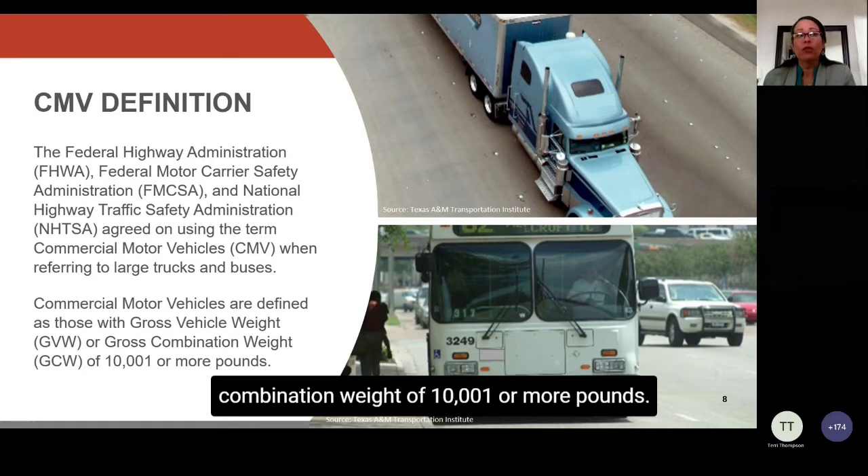Before we share some information with you, I want to make sure everybody understands the definitions for commercial motor vehicle and work zone that we've been using throughout this effort. Federal Highway has been partnering with NHTSA, Federal Motor Carrier, and other stakeholders to improve commercial motor vehicle safety in work zones. For commercial motor vehicle, we use terminology from the Federal Motor Carrier Safety Administration: a gross vehicle weight or gross combination weight of 10,001 or more pounds. For work zones, we follow the Manual on Uniform Traffic Control Devices, 2009 final version, which defines a work zone as an area of roadway where construction, maintenance, or utility work is occurring.

Unfortunately, the number of work zone crashes and fatalities continues to go up, with 2019 being the latest data available from the NHTSA FARS system. There were 762 fatal crashes in work zones. Of those, 250 fatal crashes involved a CMV. When I say involve, it doesn't mean the large truck or bus was at fault—it means the CMV impacted another vehicle or person, or was impacted by a vehicle.

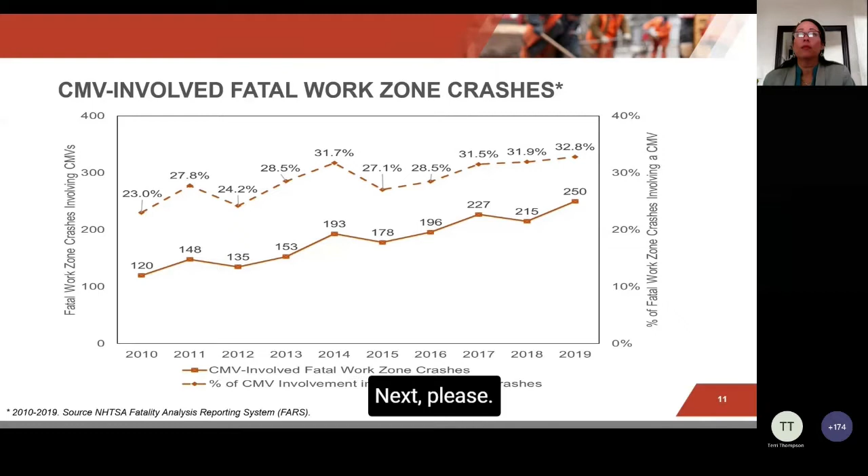We have several efforts within Federal Highway. Previously, we worked closely with some of our states and are currently developing a voluntary action plan that can be used by anybody in the nation. Our current effort, and one of the reasons why we're here today, is to share some of the findings and strategies we've been sharing throughout this new effort, which works closely with our 10 opportunity states. As part of this current task, we conducted a targeted state-level effort to promote commercial motor vehicle safety in work zones, working closely with those 10 opportunity states.

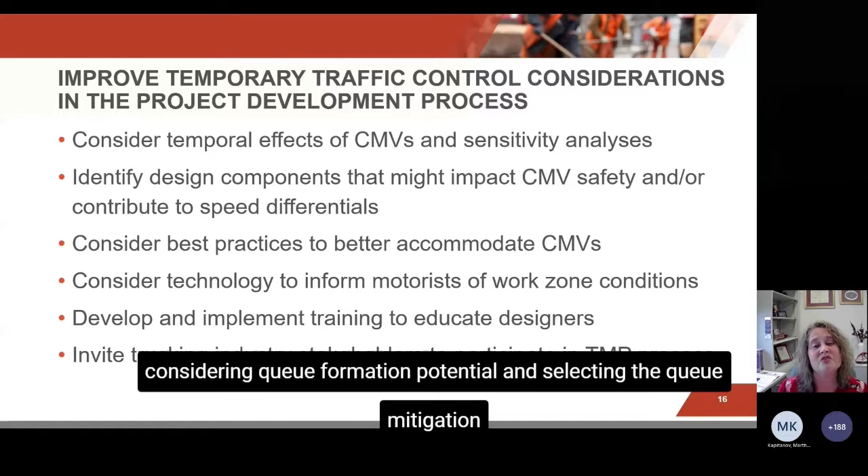A couple of things in particular that we talked about surrounding this topic: the importance of considering the temporal effects of CMVs and sensitivity analysis when considering queue formation potential and selecting queue mitigation measures. We also discussed the need to check for design components that might impact CMV safety or contribute to speed differentials early on in the project.

This could include consideration of lane widths, shoulder condition, the use of all or part of your shoulder as a travel lane to better accommodate CMVs, barrier offsets, the width of the temporary traffic control devices themselves and how that may impact your available lane width for travel, workspace needs, temporary traffic control device or work encroachment, and the design of transitions into and out of the work zone, as well as entry and exit points for work vehicles.

Best practices to better accommodate CMVs could include a variety of things, but in particular we talked a lot about going beyond the minimum design requirements and avoiding design exceptions as much as possible. This could extend the lane closure taper to account for actual operating speeds, not just the posted work zone speed limit, and providing longitudinal buffer space after the merge points and before temporary barriers.

Designing crossovers and lane shifts to better accommodate those CMVs, ensuring extra lane width through those crossovers to help with side swipes and other kinds of crashes, and removing edgeline rumble strips as needed, again to accommodate shifting of traffic, the utilization of a shoulder, etc.

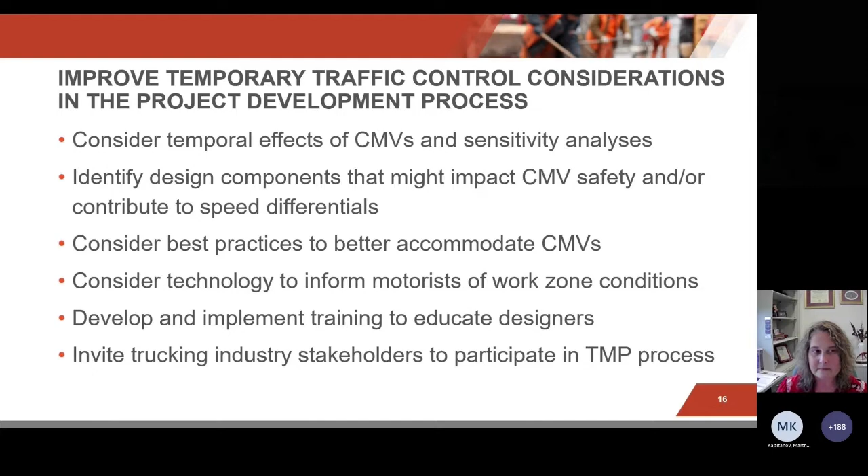In particular, one smart work zone technology we discussed a lot was that used to alert and detect queue formation. We wanted to share as part of this workshop some findings we've been sharing with those stakeholders.

But we do want to point out that the effectiveness of smart work zone technology really depends upon how often and how long queues form, and the quality of the technology and its deployment. So if you would like more information on these studies, we'll be glad to get that for you.

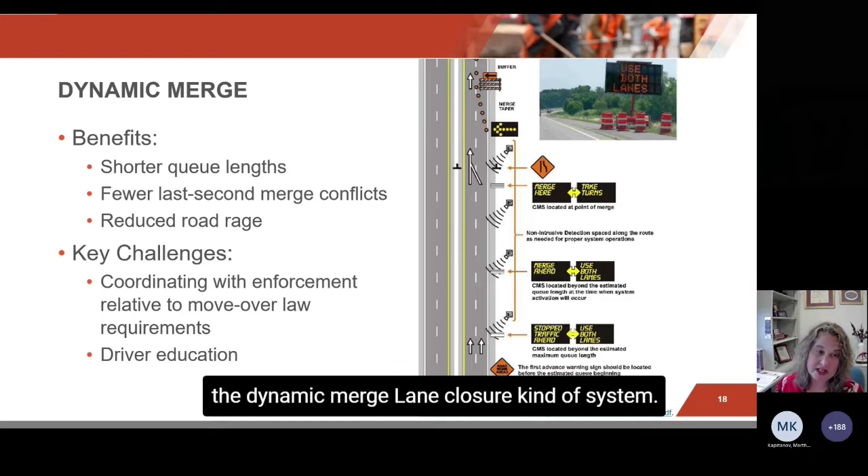We also talked at several of the workshops about the dynamic merge lane closure kind of system. There are several benefits to this system. The idea is that when you have more traffic on the roadway, you can switch to a different setup that allows your vehicles to use both lanes. And maybe when traffic volumes are lighter, they can use the lane closure in the traditional manner of moving over further upstream and forming a single line.

The benefits are shorter queue lengths when you do have those higher traffic volumes, hopefully fewer last-second merge conflicts, and hopefully reduced road rage. But we will say that we had very candid discussions at the workshops about whether or not they were working as expected based on driver education and understanding of how the system was going to work.

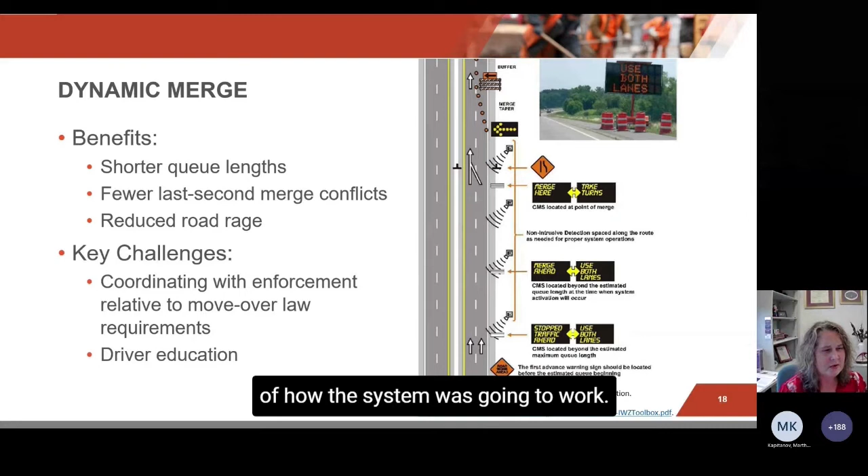So that's one key challenge, and I'll mention more about that in my next slide. But also make sure you're coordinating with enforcement, especially if your state has move-over laws. Depending on where your enforcement may be located and you're trying to conduct this dynamic merge, getting folks to either use the single or both lanes, if they need to move over because of where law enforcement is positioned, that may cause extra weaving or problems you don't want based on the system you have instituted. So make sure you're coordinating with law enforcement about where they're located and how that move-over law may impact the operations of the dynamic merge.

So a lot of discussion about additional driver education materials that are needed for this concept. We came away saying those driver education materials really should explain the proper driving behavior and why it is needed in both situations, and really the benefits to all drivers when the posted instructions are followed.

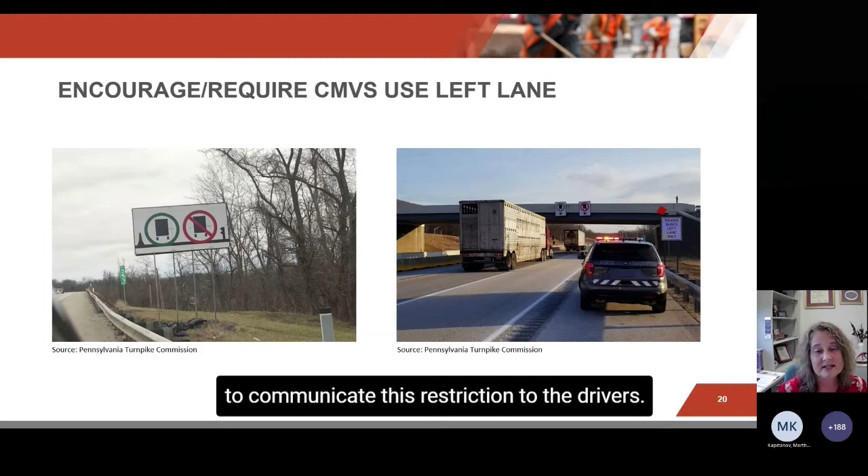They use static signs as well as dynamic message signs, pavement markings, and other devices to communicate this restriction to drivers. The innovative signs shown here were developed by the Pennsylvania Turnpike Commission and are currently used in their work zones. But we do acknowledge that CMV use of the left lane may not be appropriate for all work zones, so we encourage stakeholders to develop a decision-making process that includes guidance to aid in the proper consideration of this strategy on future projects.

State DOTs and other agencies that might want to implement this should also develop specifications and standards associated with the signing and pavement markings that would need to be used. And of course, public outreach and enforcement are also critical to the success of this strategy.

Lots of discussion also surrounded speed differentials that occur in construction areas, and one of those locations is where we have construction vehicles entering or exiting the workspace. Those highly transitory events can cause slowdowns and backups not necessarily associated with the traditional speed differential we think about from the back of a queue, that technologies may be able to help with. So we talked a lot about providing acceleration and deceleration lanes and designing standards to be able to do that. We talked about smart work zone technology that can warn about those conditions and let folks know vehicles may be entering the traffic stream.

We also discussed the use of enforcement at those areas, realizing that may not be possible all the time depending on the design of the work zone. But if you're thinking about that early in the project development process, you might be able to put in law enforcement pullout areas or something they could utilize near areas that are going to have high levels of work vehicle traffic coming in and out of the traffic stream. Or there may be other innovative techniques that could help enforcement in those areas.

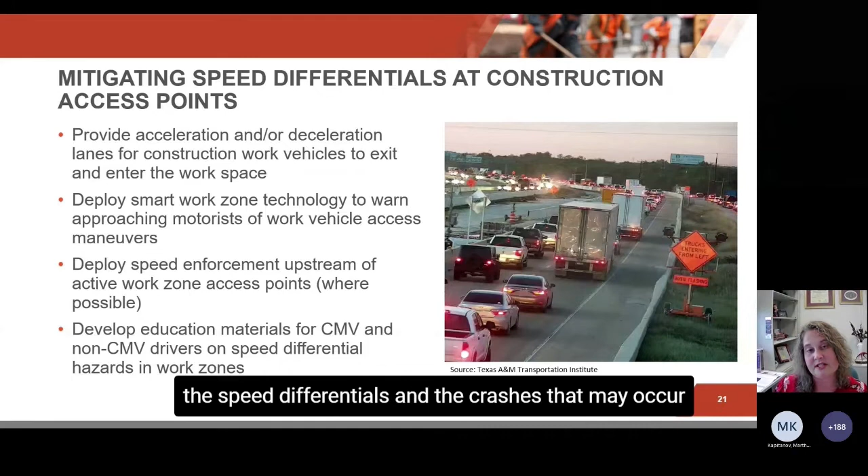Also, when developing information about work zone safety and CMV safety in work zones, and sharing that with the public, noting and talking about where these speed differentials can occur, why they occur, and educating the public about that was seen as a critical piece to help combat the speed differentials and the crashes that may occur from those.

We did throughout the workshops make sure and touch on engineering, enforcement, and education. I hope you're catching that theme. It's not just all about engineering, but there were a couple of things particular to enforcement that came out of the workshops.

Not only the access and egress points I mentioned, but even potentially using enforcement on the shoulder upstream of queues. Several enforcement agencies are helping with this and have developed internal policies about what they allow their officers to do. We acknowledge there are challenges, especially if queues grow quickly, or if under construction you have limitations with shoulders or narrow lanes, which can make that strategy more difficult to implement.

But again, something to consider. The earlier in the project you consider it, the more you can coordinate and see if that's a feasible approach within your design. We did hear about a lot of innovative techniques to target dangerous driving behaviors outside and within work zones.

Several states are beginning or have been using automated speed enforcement. One entity was using subdued vehicles, which they called ghost vehicles. They were painted a little differently so they didn't quite stand out like police vehicles, but still had the proper markings on them, so as you got closer you could see they were law enforcement, with lights, etc. But this allowed them a slightly different way to enforce.

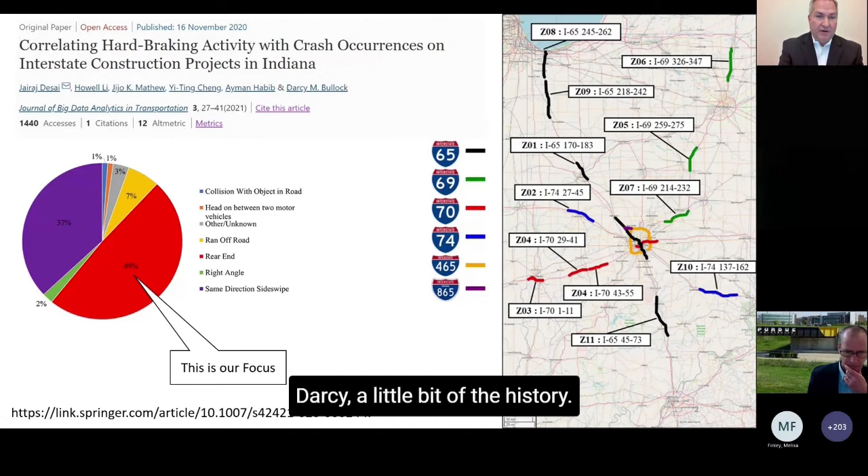A little bit of the history. This slide does show the crash occurrences and the relationship of the cause and events, focusing on what were the problems in the work zone. You can see that big red 49% area right there. The rear end events showed to be a particular concern in these events, and many of them involve commercial motor vehicles. I realize this is a CMV presentation, but we found that our efforts in this program affect everybody, though CMVs are the biggest player. So that's how it is germane. Again, we saw that nearly half involved rear end crashes.

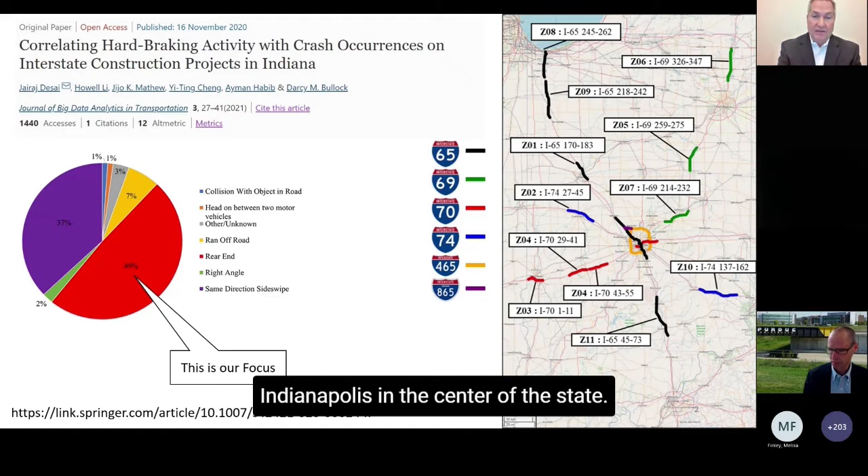So we said, what are we going to do about it? In 2019, we had a horrible fatality on 465 — that's the gold or amber circle around Indianapolis in the center of the state. That was the moment we said to ourselves, we've got to do better, as Darcy is highlighting right there. That led to a lot of discussions and looking around at what was out there. So with that, next slide please, Darcy.

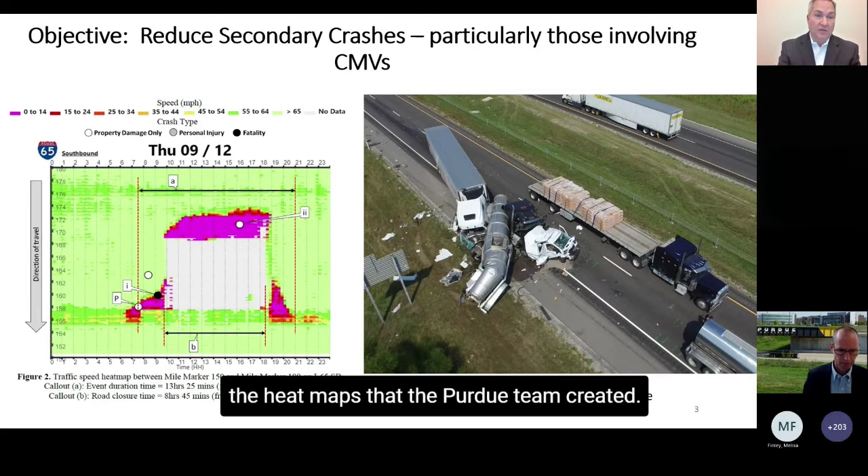We acknowledged along the way that there were crashes, and so many of the worst results came out of secondary crashes. As you can see there, we've got trucks getting into it — this is very frequent in work zones. The heat map at the bottom left shows a primary event leading to a secondary event, and the secondary event is really where it exploded. Darcy's going to talk extensively about the heat maps the Purdue team created, so I'll dial back from that. But it shows the primary event created some congestion and a bit of a problem, while the secondary event is where it really blew up.

The big white area in the center shows no progression whatsoever — that's where we're not getting data. Beyond it, several miles of congestion and a long duration, many hours. That particular event was before 10 in the morning till after 6 at night. That is extreme loss of capacity. So that's the kind of situation we're trying to address with this particular program. Next slide please, Darcy.

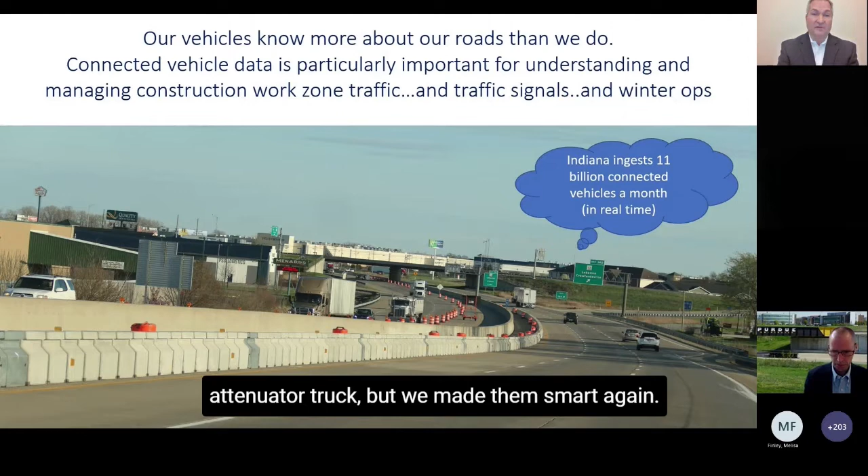So our trucks, basically, they are a glorified attenuator truck, but we made them smart. We made them connected vehicles, and we used connected vehicles to make the work zone safer for everybody, including the CMVs. We are managing it through the connected vehicle data that we're obtaining, but we're also using other feeds as well, whether it be the crowdsourcing information we attain from various third parties.

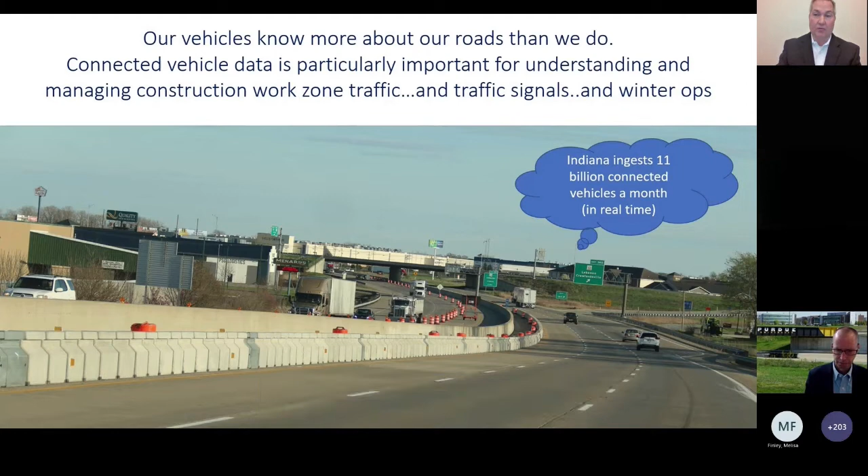And that speaks to the point there you see in the slide. We are ingesting a heck of a lot of data in real time and taking a commanding use of it in near real time. Darcy's going to show some of that again in the upcoming slides, how we're doing it very effectively.

So next slide, please. So again, there's the picture of a Q truck. As you see there, it is basically an attenuator truck. This was a private party truck that is not the ideal prototype. We've learned that we want the be prepared to stop message down in front.

We want the message board up on top, but less conflicting that way. But again, critical components that are worth mentioning. We're trying to create a brand, the be prepared to stop with the chevroning and the flashing lights across the top that are basically not overwhelming, but an alarming delivery. Hey, look at this. We're commanding the attention of the motorist, and we're trying to make them aware that when they see that, to the point they don't even have to think of it. We've marketed it, and we're trying to create familiarity.

So again, we are actively using the connected vehicle data to develop dashboards, as Darcy said, but we're using it strategically to know when and where to deploy these. So these are not cheap trucks to use, and they're identified typically during the planning process in a project. Queue management becomes a big consideration. Ideally, we want to eliminate queues in construction project. We want to design them with minimal queuing, but I think everybody on this call recognizes that queuing on some projects occurs. So with that, we're trying to strategically deploy them.

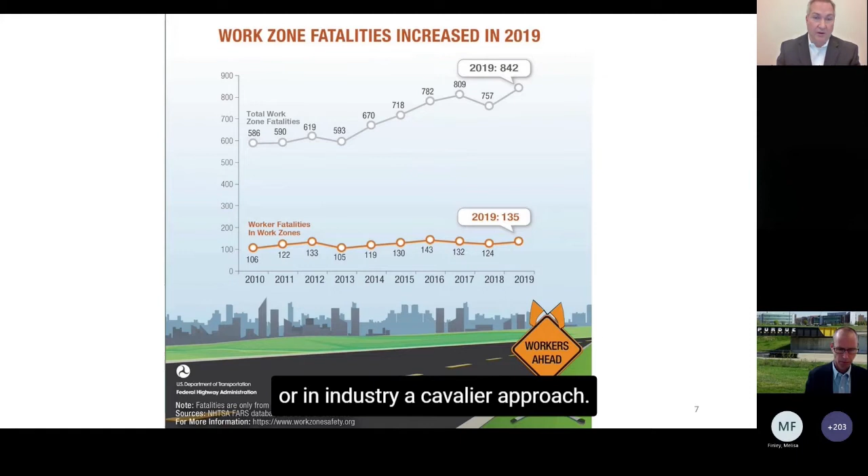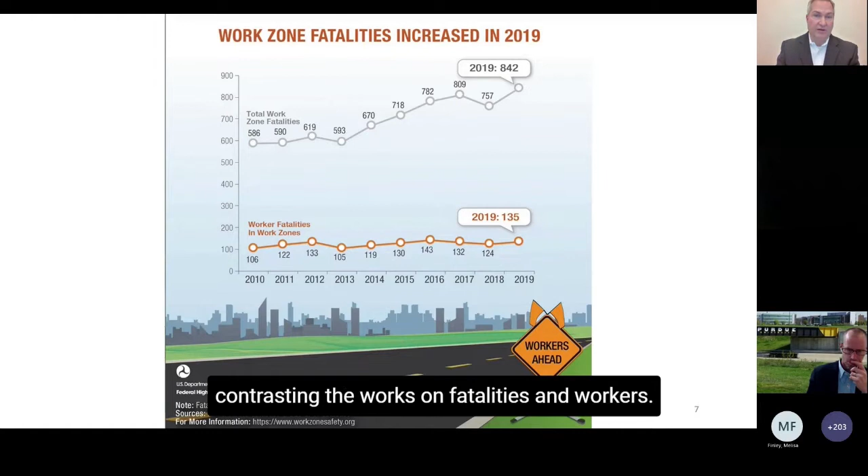Again, this just goes to show that over the years, fatalities have increased, and I don't think that speaks to a lack of dedication or in industry, a cavalier approach. It's just there's a lot of work out there. There's been a lot of congestion. So 2019 was kind of the year for us to take stock and say how we're going to do better, and it's shown in the data. It's been creeping up. This is nationwide data. We're contrasting the work zone fatalities and workers.

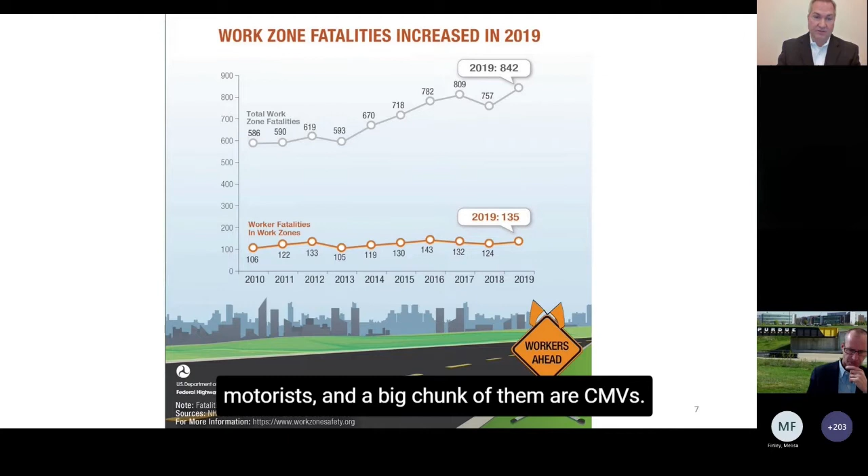I've always contended workers cannot be ignored. Lifetime of exposure. We've got to do everything we can to protect them, and I believe this Q truck program does that. But we also see out there that most of the people that die in the work zones are motorists, and a big chunk of them are CMVs. So again, we're trying to support that as well and create the safest work zones, even when queuing is prevalent. Next slide, please, Darcy.

I have to admit, and Darcy beat me to the punch, which is fine. We were not original in this. We looked around, and when I talk about this program, I've got to take my hat off to Brad Freeze in Tennessee as one of the leaders originally developing the Q truck.

We looked around and we built upon it. So as you can see there, we're creating a brand, a logo that, if you would go ahead and show the next part, it isn't an accident that our Protect the Q logo that we're trying to brand looks very much like TDOT. We want this to be universally recognized. And as I see Clay said, go TDOT, I'm right there. We had great partners with them, but we want this to be recognized nationally.

And I'm in the hopes that Kentucky is able to jump in and develop this as well, get an I-65 corridor going from the Midwest down to the South. That would just be an amazing thing to see. But we piggybacked off them. I always have to mention that. So next slide, Darcy, please.

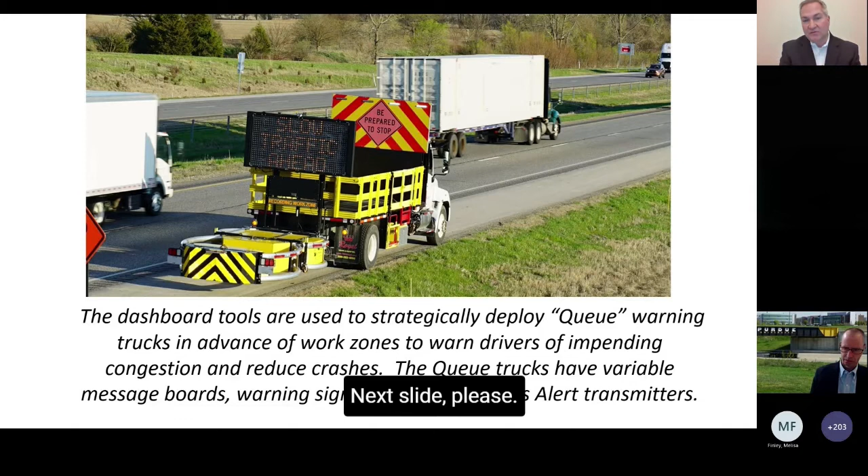We have information out there, a general information site that our INDOT communications people created to provide general information. This site provides public awareness, with a good video there that provides additional content for those who want to learn a little bit about it. But the next slide, if you would, please, Darcy.

This one is where we have the content. There's a training video, different from the general information video. When we ask people to drive these trucks, we have them watch the video, read over a document, and affirm that they understand it.

Then we came up with the TQMMCS template. That's a whole lot of letters, but as part of what we concluded with the construction lobby, we wanted them to submit how they were going to deploy it. We wanted them engaged and part of the process. One of the immediate pushbacks was, 'we're contractors, we are not designers, we don't want to design anything.' So the TQMMCS, traffic queue management means and methods coordination submittal, came up with this language basically as an affirmation that we're coordinating, acknowledging the designer's design, and submitting accordingly. That's one of the byproducts of our collaboration and negotiation with the construction lobby.

And we've got a special provision. Again, hats off to TDOT—I can never talk about the success of this program without acknowledging them. They shared their special provision and we built upon that. This is something used in construction projects, contrasting between Tennessee and INDOT.

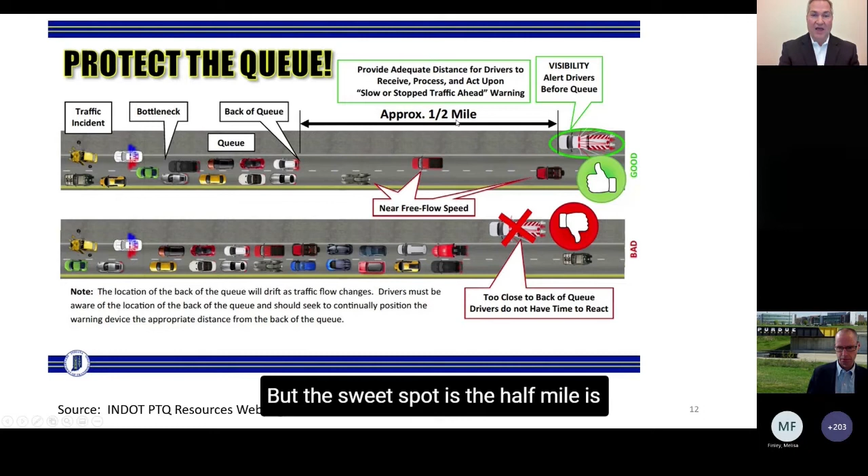We took a card that mirrored that and built it for protect-the-queue. We're trying to get the trucks positioned a mile down to a half mile, even a quarter, but the sweet spot is about a half mile, as shown on the slide—a little more, a little less. We just want to wake up motorists so they're aware in time to adjust, but not so soon that they forget about it. That content is available on the website I mentioned as well.

And we make these available to the drivers. Next slide, please.

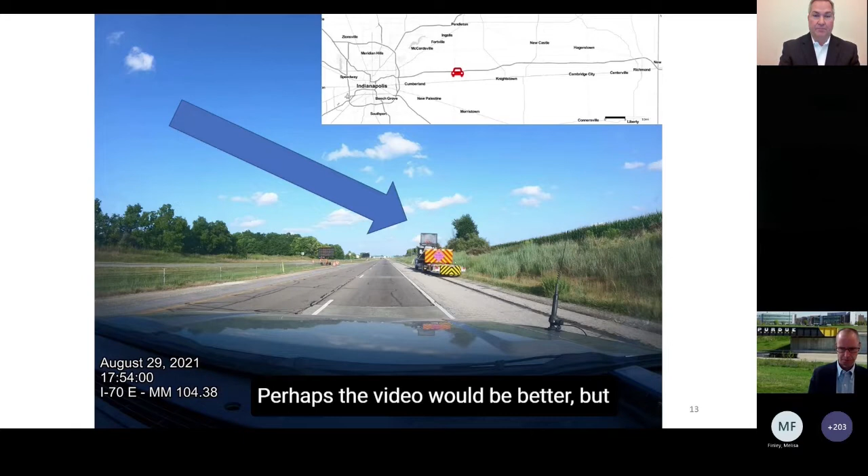Thank you, Darcy. This is one that Darcy at Purdue provided, showing the experience of approaching a queue truck. Perhaps the video would be better, but these are not trivial to see. And there it is—the next slide. As you approach it, you see the queue truck. You should be able to read 'Be prepared to stop,' which is integral to the messaging.

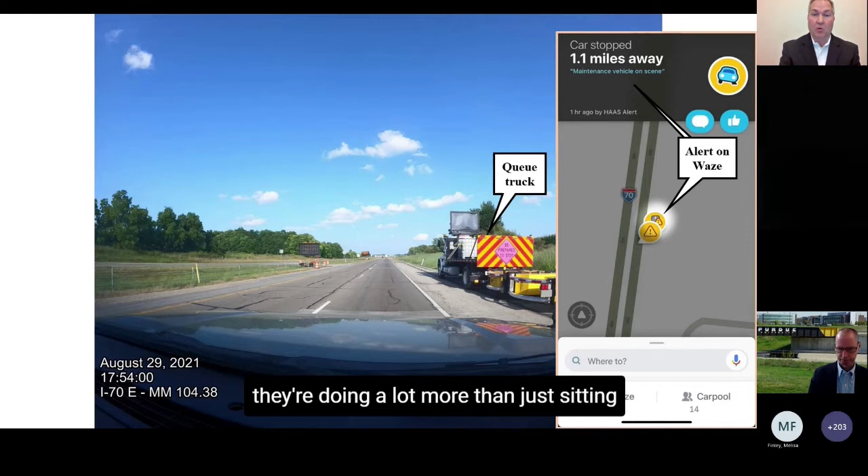What also shows up in the background is an alert on Waze—if the driver has it up, they know, 'oh, 1.1 mile away.' This might be a bit far, but it's still effective. Darcy's going to talk about the overall effectiveness of the program, which is still effective at getting the message out there. These trucks are hard to ignore as you approach them, and they're doing a lot more than just sitting there on the side of the road. So next slide, please.

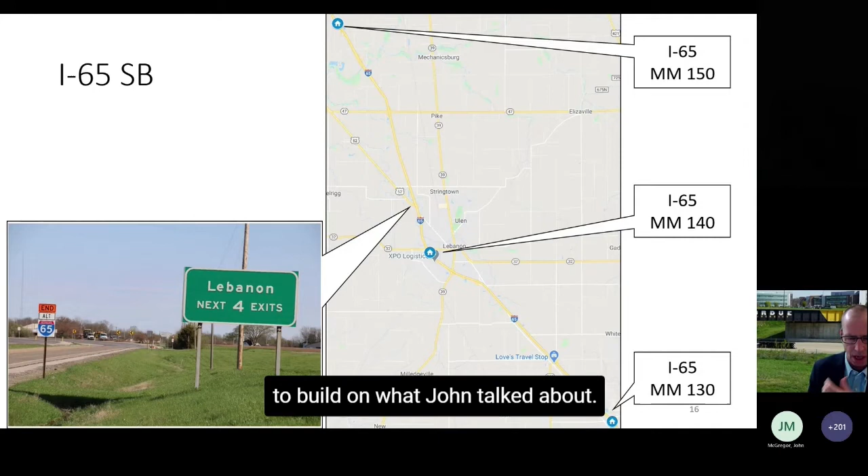He foreshadowed a little bit about connected vehicle data. Those queue trucks are connected, but we're also bringing in connected vehicle data from the vehicles traversing the roads. Martha or Melissa, you had 43% of the crashes were rear end in work zones—we got 49 or 50%, so very similar numbers. What I'm going to talk about is how we're using that connected vehicle data.

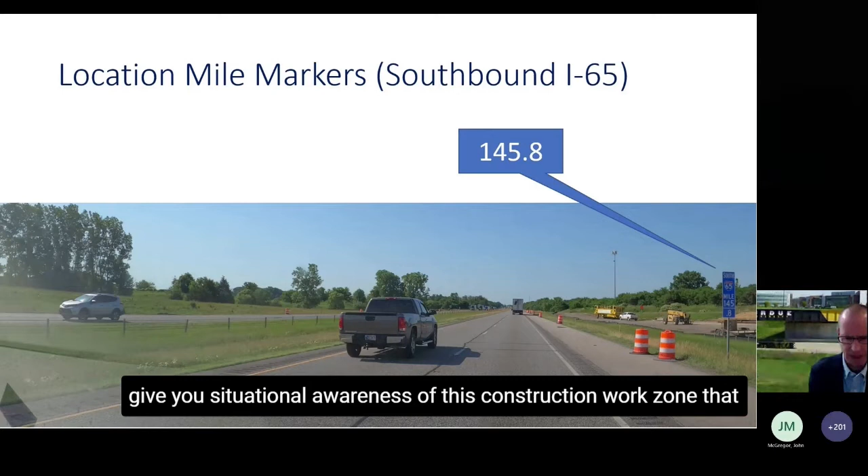Before I jump in, I know I'm looking at the list of participants around the country, all state DOTs. Oftentimes we give this presentation to people who don't know what a mile marker is, but I'll show you these mile markers to give situational awareness of this construction work zone in the Lebanon, Indiana area, just north of Indianapolis. A couple mile markers along through here, in the 145-ish range, and these photos were taken earlier this year.

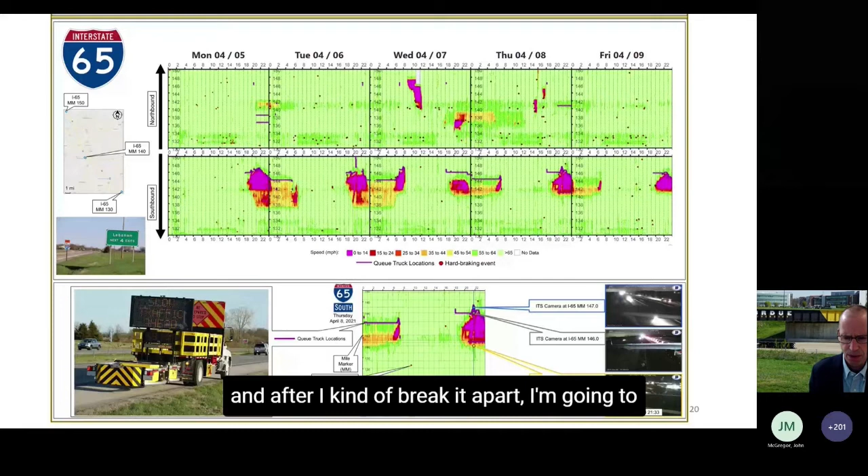What I'm going to do now—this is a very dense figure—in the next couple slides I'll break it apart, then volley to Misha to maybe make some commentary. But as John said, data is critical for work zone management.

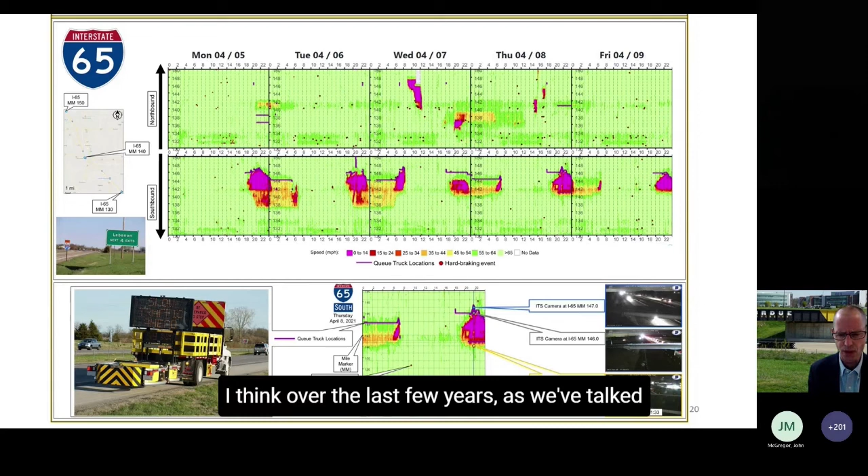When Melissa you started out with your slides earlier, you segmented on verified queues present. I think over the last few years, as we've talked about smart work zones, we've concluded here in Indiana that connected vehicle data is probably more robust for identifying where the queues are than being dependent upon sensors placed at, say, quarter or half mile spacing. So I'm going to share how that connected vehicle data looks here and what we're doing with it.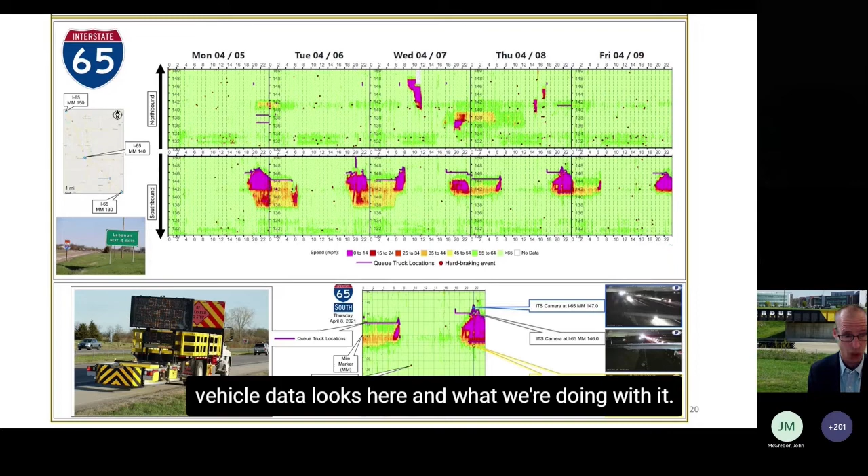As we go through this, there are four items you want to be able to read off these heat maps: the location, the speed, where the queue truck is, and this notion of hard braking. I'm going to step through each one of those.

If we look at these boxes on the right, I'm showing you I-65 South, from mile marker 150, 148, 146, all the way down to 130. The y-axis is the linear spatial location along I-65, and traffic is driving from top to bottom. For speed, I've got this legend along the bottom, greater than 65 all the way down to the purples, which are 0 to 14. The last thing is the time within the day—midnight, 6 a.m., noon, 6 p.m., midnight—so you can quickly, at a glance over a 20-mile region, see where our queues are, where the back of the queue is, how it might be progressing, and when it clears.

If we look at this purple line, that's the location of our queue truck. We have telematics on all of our queue trucks, so when they're out there on the interstate, we know exactly where they are relative to the queue. As John indicated earlier, the sweet spot—pick your number—is about a half mile in advance of the queue. This gives us a tool to monitor how close, or how well, or whether they're even deployed out there. As you work through it, there's always a difference between where we're modeling there might be queuing and where we may actually get queuing.

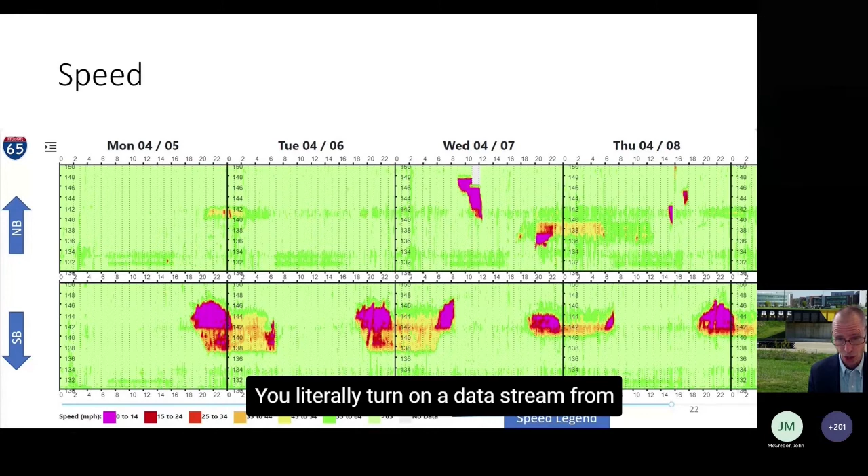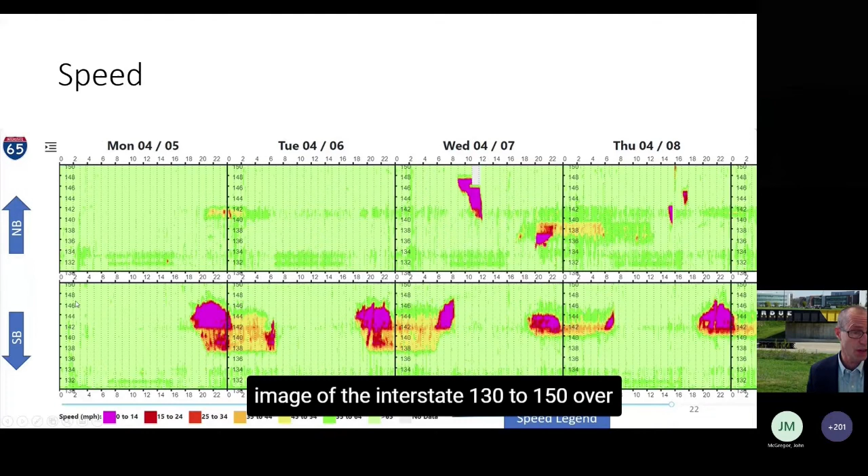So now we can look at a week of data, and this is where the connected vehicle data is just beautiful, because you don't have to deploy any sensors. You literally turn on a data stream from a data provider. I'm showing you in 2 directions, northbound and southbound, a 20-mile image of the interstate, 130 to 150, in this particular case Monday through Thursday, over a little over 4 days.

You can see at a glance the recurring nightly congestion in the work zone where they're taking a lane during the evening. I'll come up to this a little bit later - this is actually an incident that was unexpected that we'll compare with.

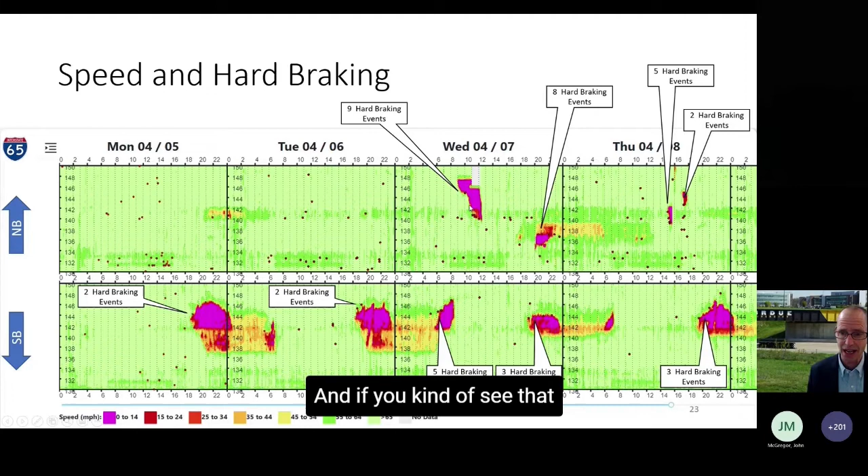And then we can bring in what we call hard braking events. I'm just going to toggle back and forth - no hard braking events, now I bring in those red dots. What you really want to start looking at, and I'm going to foreshadow just a little bit, this is a queue that was unexpected due to an incident and didn't have any queue protection. If you see that clustering of dots at the back, that's exactly what John McGregor was talking about - we want to alert drivers that there's a queue coming up.

So now I'm transitioning into these purple lines. When you see these purple lines, this is where the queue truck is. If you look up here, this was one that was not planned - it was an incident there. You can see there's more hard braking. So what we did is we know hard braking is a risk factor for crashes.

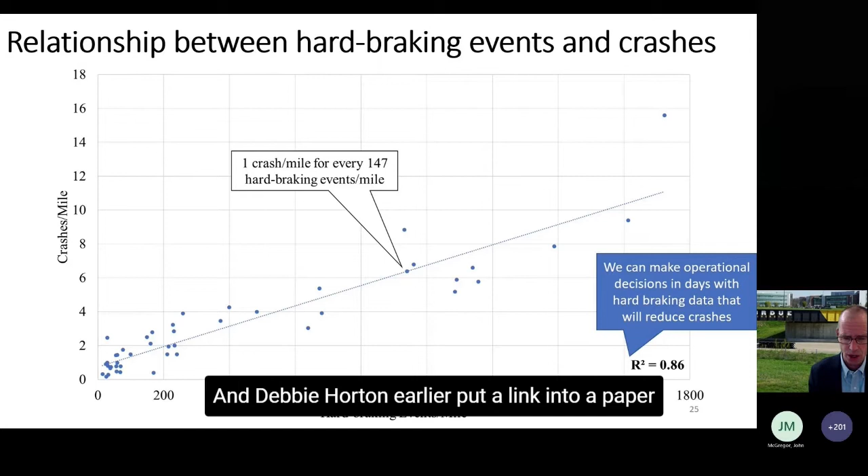Debbie Horton earlier put a link into a paper that John McGregor referenced that talks about a study INDOT did a couple years ago that basically showed for about every 150 hard braking events out there in 2019, we saw a crash. It had a very strong correlation coefficient on it. So if we can reduce those hard braking events, we can reduce crashes.

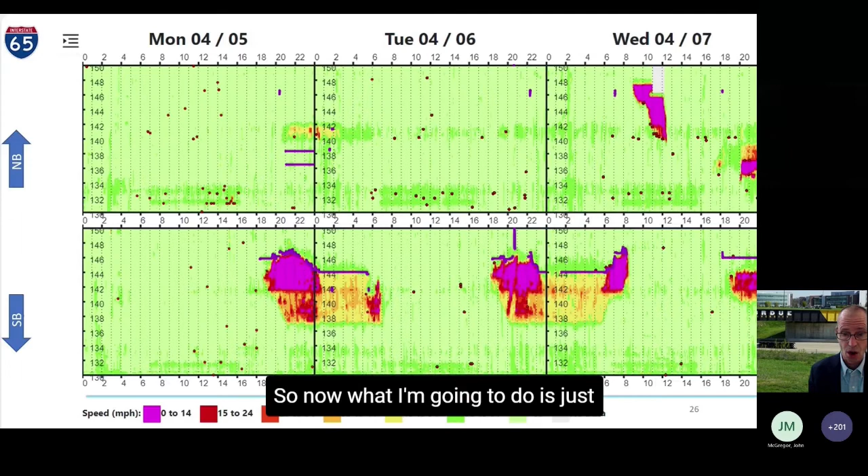So now what I'm going to do is take a little bit deeper dive, and I'm going to compare those two days. This particular location was one with a Q truck - it had 2 hard braking events over 5 hours. This one had 9 hard braking events over 3 hours with no Q truck present.

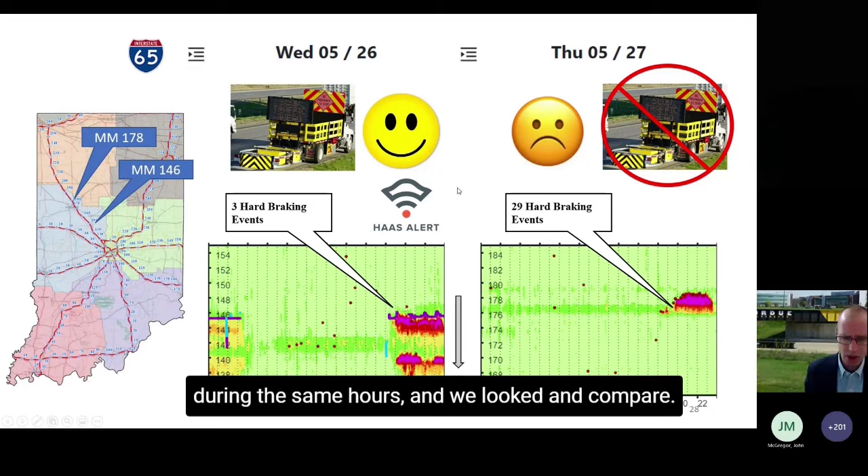What we did is we went through and did an extensive analysis of over 400 hours of queuing, and we normalized it during the same hours, and we looked to compare. Here's a location on the interstate that had a Q truck - we had 3 hard braking events. Here's a job that did not have a Q truck - it had 29 hard braking events, almost a factor of 10.

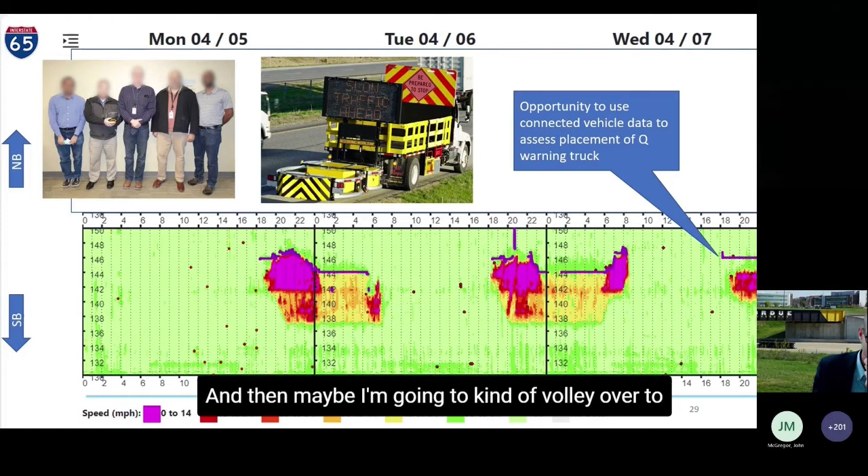So we scaled that analysis, and one of our students went through and analyzed several dozen work zones. I'm going to bring Misha into the conversation in just a little bit. Misha, I'm foreshadowing just a little bit when I'm going to show the next one, and then maybe I'm going to volley over to you in terms of how the telematics on the Q truck is helpful in relation to where the queues are. But I just want to maybe bring a full-size picture of Misha in to give him credit.

Misha has been just a huge asset. It's one thing to look at the data, but if all we do is admire the data and we don't have partners like Misha and John McGregor to do something, all we're doing is admiring the data. They've been the ones behind this, working hand in hand with the contractors to actively make decisions. So maybe Misha, volley over to you - I think one of the things you've been focusing on is kind of looking at Q truck placement relative to queues. Over to you, Misha.

And you might be on mute. Thank you, Darcy. Can you hear me? Yep, all right, I'm recovering from that photo. I was surprised by that.

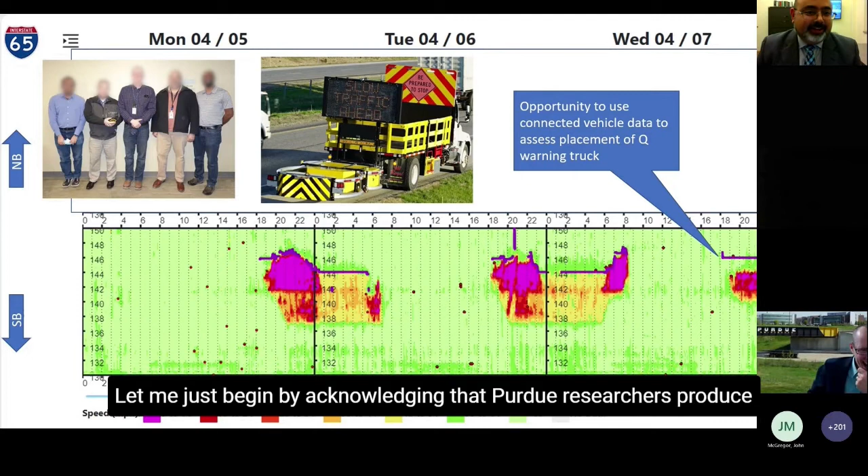Let me just begin by acknowledging that Purdue Research has produced a whole host of awesome and game-changing tools that we as an agency utilize on a daily basis and have come to depend on. Today we're just focusing on one of them, the heat map, and by itself its capabilities and usefulness are used every day.

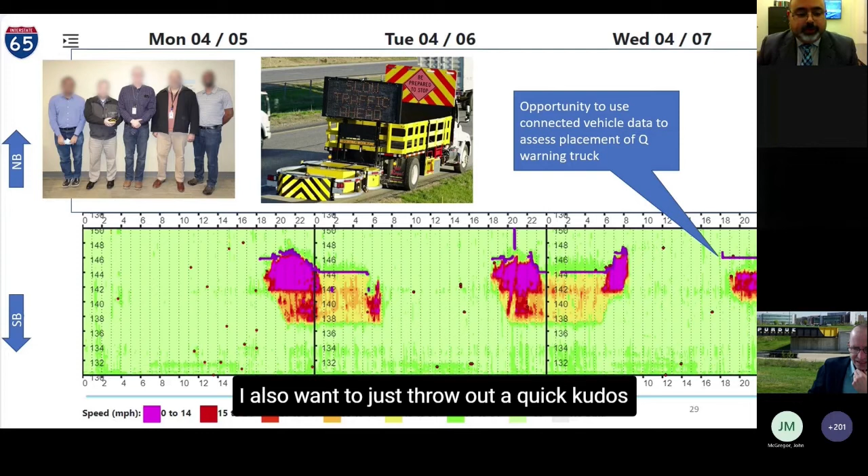I also want to throw out a quick kudos to my boss - why not get a little brown nosing in on a national webinar. But yeah, kudos to John and his efforts spearheading the Q truck program, because it is extremely effective at reducing back of queue type crashes and queuing. And the heat map, as Darcy has been showing, really confirms that.

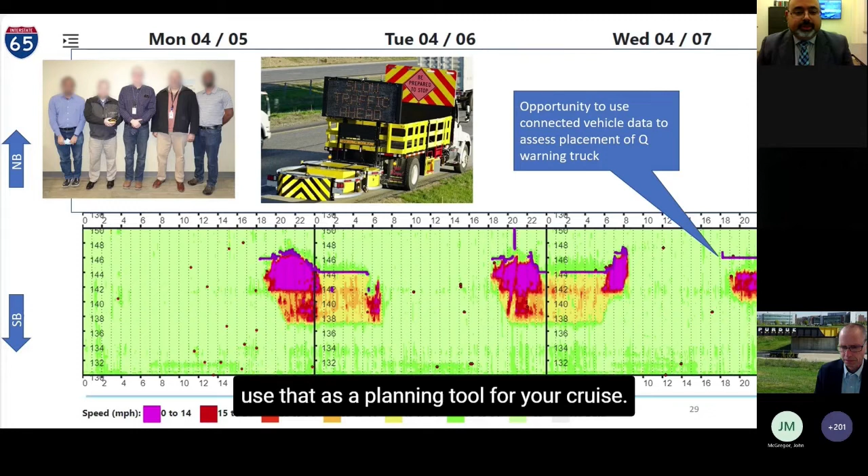So we do use the heat map for a number of things. First, since we've been talking about the Q truck program, we've been employing the heat maps as a planning tool as well. Once you've got a work zone set up and even a week's worth of data, you can go back, pull up the heat map, look at it, and use that as a planning tool for your crews - when do we need crews out there, when and where do they need to be thinking about setting up, how long will they be out there?

So that's great as a planning tool, and also as an after action. From the slide he's got up, if you've got multiple Q trucks deployed, you can see how their staging is working and if they're being located and employed correctly - it's really amazing. When you also pull up that hard braking data in conjunction with the heat maps, along with the Waze data shown with the purple lines, it becomes really fairly easy to ascertain whether or not the Q trucks are being deployed correctly.

Awesome, yep. Also, we use the heat maps for a slew of other tasks, like for example in work zones, we go out and do our work zone reviews. We identify issues and problems, and one of the great tools we can rely on to help get buy-in in the field that yes, there's a problem and we need to fix it, is the heat map, and especially the hard braking data.

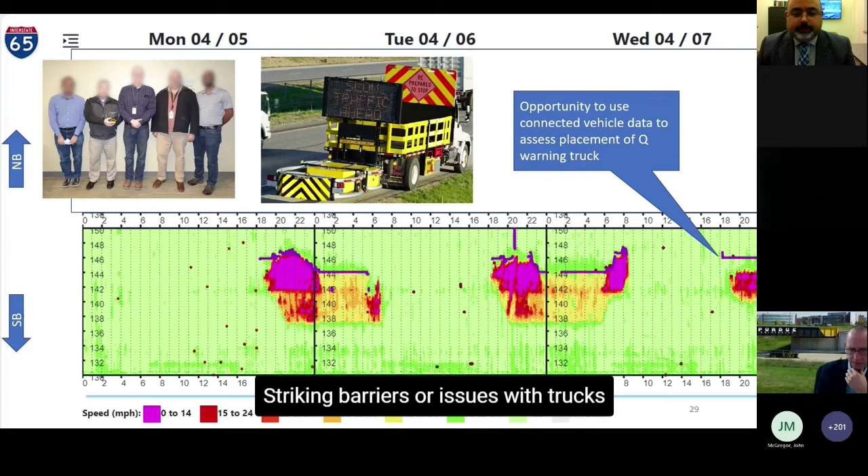Through that, we can tie this back to CMV specifically - specific work zones where we've had issues with trucks striking barriers, or issues with trucks often correlating to tight conditions or problematic transitions, and those are focus points for us as well dealing with CMVs. But the heat map and the hard braking data both help highlight those locations, as well as when we're looking to see if our recommendations are being effective - they help confirm that too.

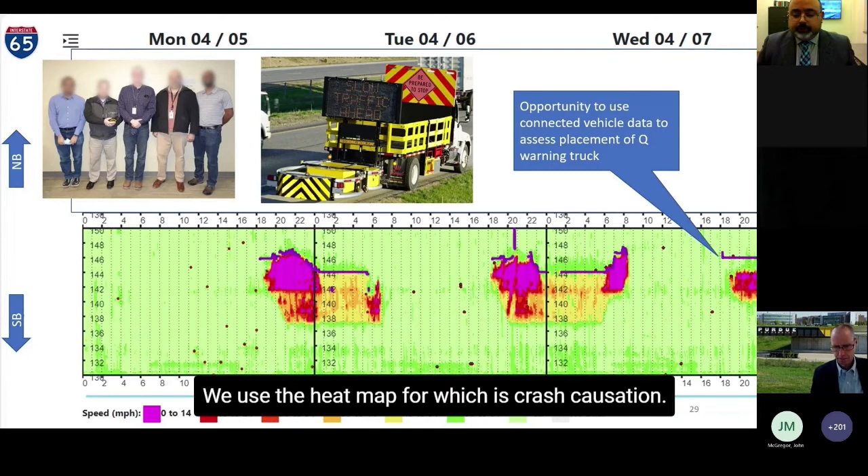The heat map too - I don't think we're going to talk about everything it can do, but you can overlay weather information, get vehicle trajectories through the work zone on the heat map itself. It's tied to the traffic cameras that are available. If there are cameras available, we can cycle through the photos using a slider on the tool, which is very handy when we're looking at crash causation - when we're looking at whether the work zone could have been a contributing factor to different crashes. This tool is just loaded with different tools and features that help make that possible or somewhat easier. And with that, I'll turn it back over to Darcy.

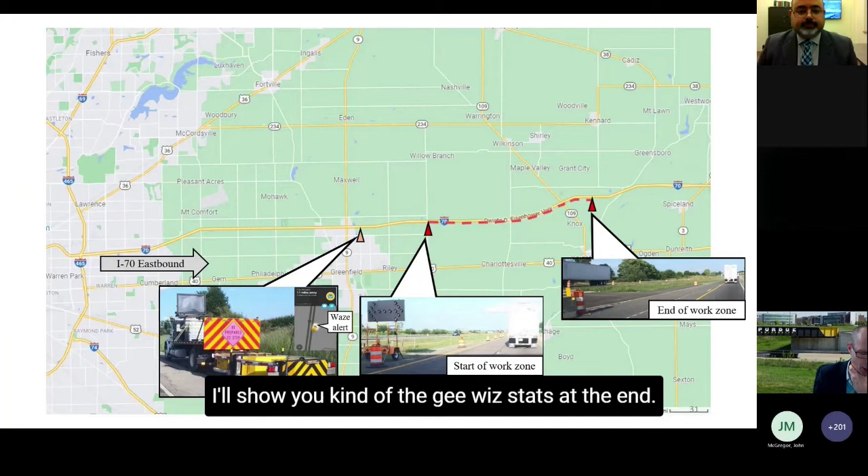Thank you, Misha. So I'm kind of into that recap phase, and I'll show you the gee whiz stats at the end. But just to recap the Q truck analysis, Misha and John have deployed these around the state. I'll show you just some images from I-70.

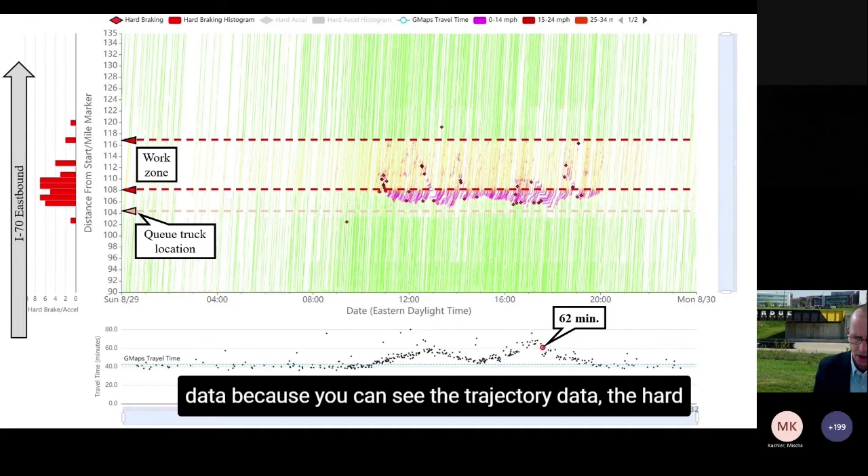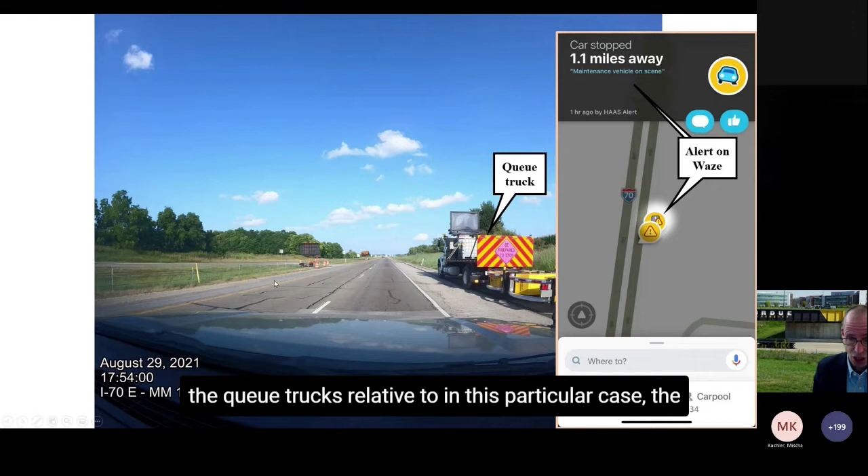We have become a huge believer in the connected vehicle data because you can see the trajectory data, the hard braking, and the travel time. John showed you seeing the Q trucks relative to, in this particular case, the queue is right off there, about a half mile ahead, and that's when we want to get that warning in.

And the goal, as John said, is to avoid those secondary crashes. So now the question is, did it work? We know if we can reduce hard braking, we can reduce crashes. So one of the other colleagues in the photo there, Rahul, Jairaj and Jijo, analyzed 430 hours of queuing, and these red dots are basically the rate of hard braking per connected vehicle trajectory, and then the red dots when we didn't have the Q truck, and the green X's are when we had the Q truck out there.

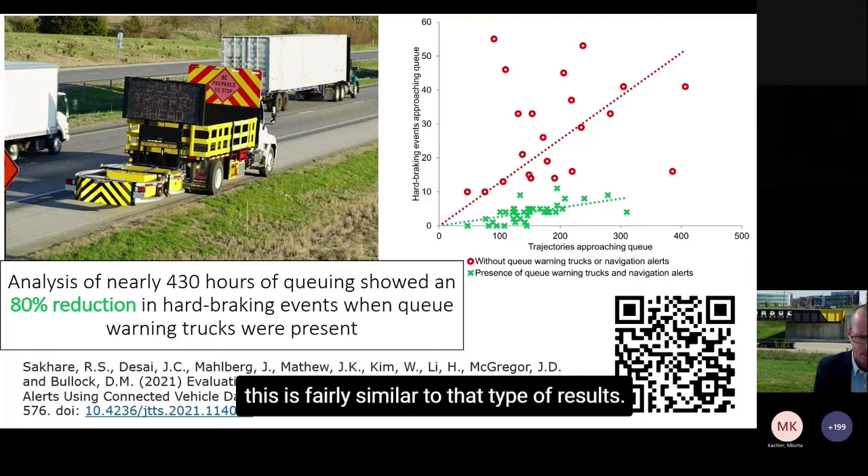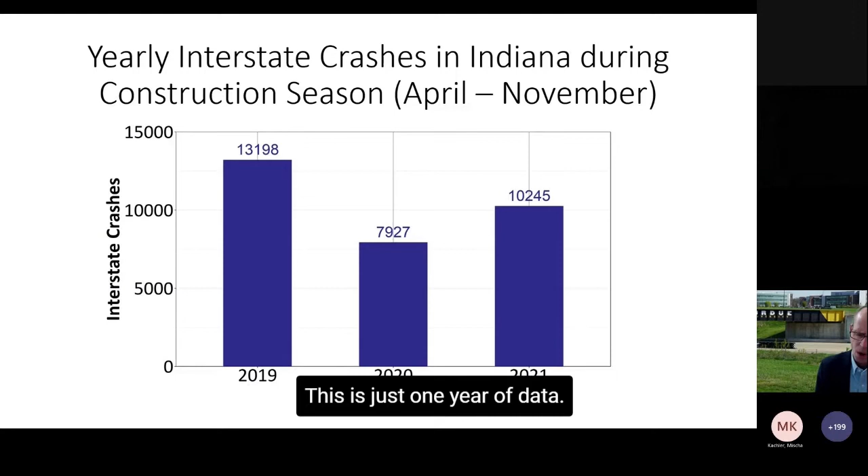So we had an 80% reduction. Melissa, when you started out with some of your slides at the beginning in terms of the confirmed queues, I think this is fairly similar to that type of results. And the part that's exciting about this is this scales really well nationally. As Melissa and Martha talked about, half our crashes in Indiana are back of queue. If we can reduce that, that's wonderful. John talked about how we are actually seeing reduction of crashes out there on the interstate. This is just one year of data. Volumes in 2021 were more or less what 2019 was. So we're feeling very confident between the reduction we've seen in the crashes as well as the reduction in the hard braking.

All of these are in this paper. There's a QR code if you scan. Debbie's put a link to that paper in the chat, so if you want to click on that.

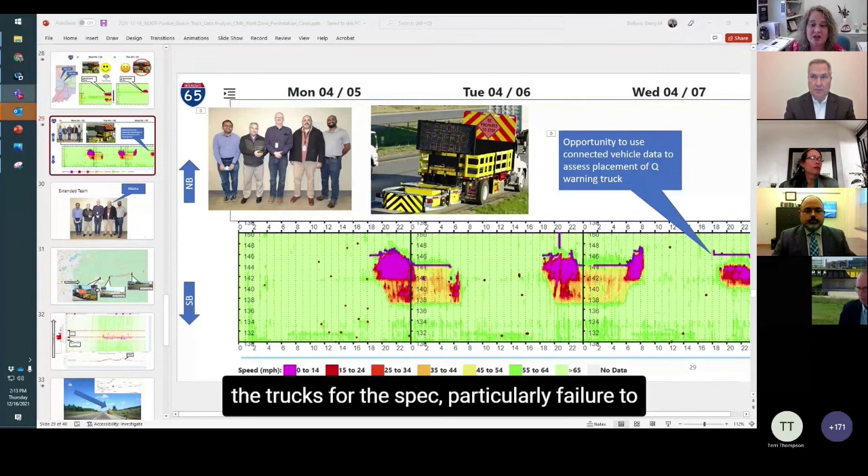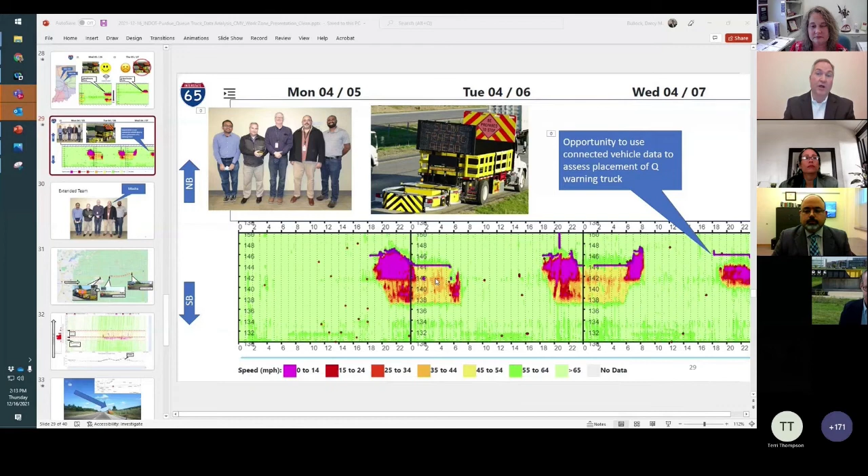What is interesting to me about the research that Darcy did is, if you get into the heat maps, you can see - and I see a perfect slide there - you've got different placements. On one hand, you've got the queue truck right up against the queue on the left. On the right, it looks like they're a couple miles out. In the middle slide, it almost, at least around the 6 p.m. hour, looks like the nearer ideal situation where you've got the truck in advance of the queue. Like I said, there's different opinions about this. These trucks were designed to wake people up, tell them that yes, there's a problem, but you need to think about reacting to it, not so close that you're slamming on the brakes.

But irrespective of the exact placement, we found that they were generally effective. That was surprising to me. I think the success is driven more by the presence of the queue trucks than the exact placement. But we know we don't want them right up on top of where drivers have to jam down the brakes, and we don't want them so far out that they forget about it. So that question goes back to more advanced notice for detour planning - that's a whole different result, and I understand that truckers want that. What we're trying to do here is make people aware of an immediate threat.

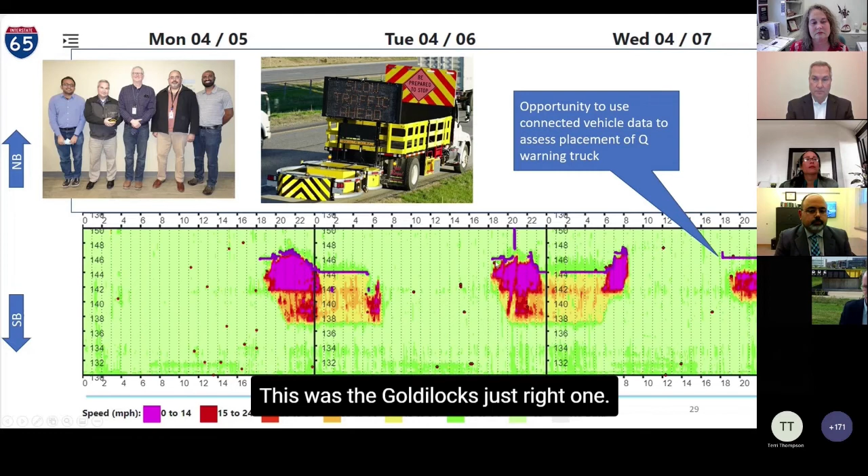So maybe I'll just add one comment to support John. I think the key thing is mapping the queue truck into the connected vehicle data milepost. As John pointed out, this year we were still learning what was the best placement. So probably 2 miles ahead is a little too far. Here was a case where we probably had the queue overtake the queue truck. This was the Goldilocks, just right one. And this was about 5 days into it, right?

Right, and there's another important point that wasn't mentioned. One of the concerns we encountered working with the construction lobby here in Indiana is they do not want to back up their trucks—there are insurance issues with that. They need to drive around. So the typical deployment is to have 2 trucks present, one in a standby position and one protecting the queue. When the queue truck is overtaken by a growing queue, the second one jumps into the protect-the-queue position, and the other one circles back in some manner. However, as the queue dissipates, the queue truck can drive forward. So there are logistical challenges we tried to manage by using a second truck in almost every application.

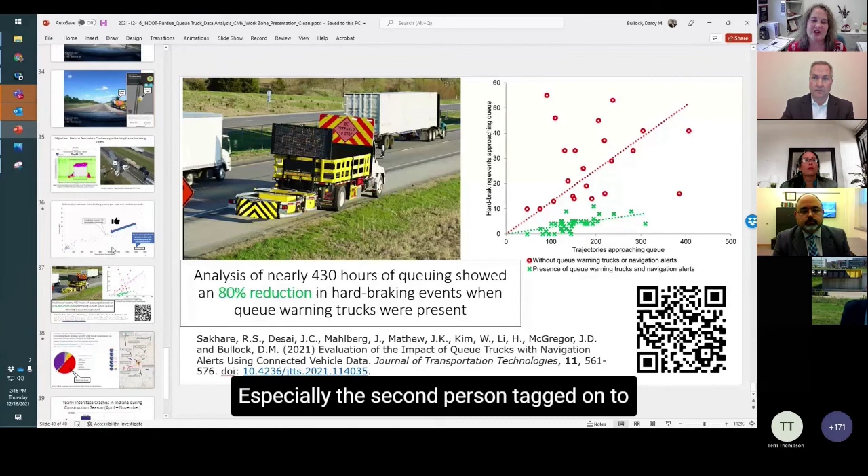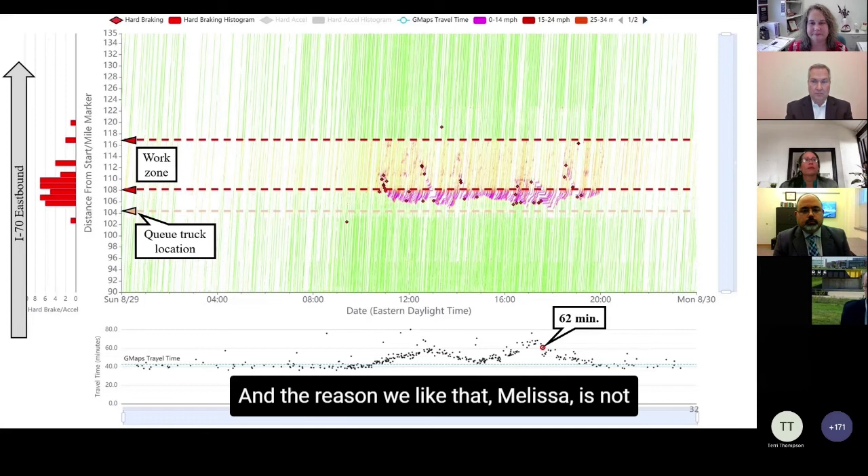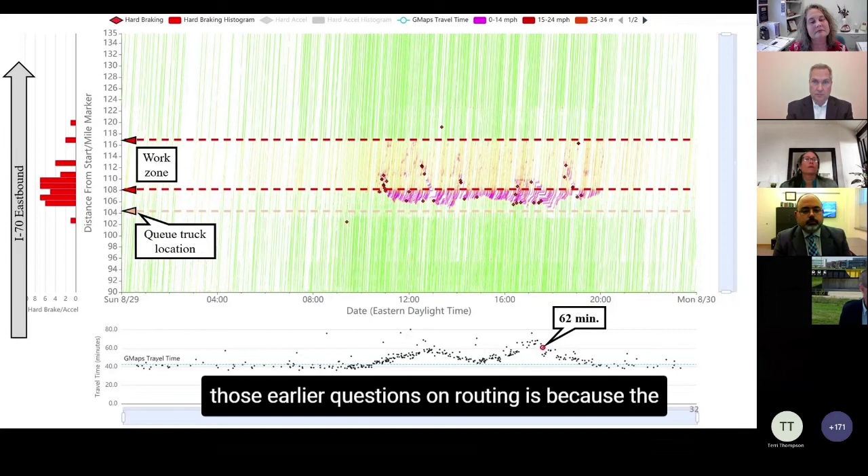Great, thank you. Darcy, this next question may be for you. It asks where you're obtaining the connected vehicle data from, especially the hard braking events. We're data agnostic, but the data provider we're getting it from is Wejo. The reason we like that is not only do we get the individual trajectories going through, but we get the hard braking, and we can also calculate the travel time through. It also gives us the ability to do some detour analysis. What we're finding, from one of those earlier questions on routing, is because commercial drivers are using their own software, sometimes they're routing on alternative routes other than the assigned detour route. So in summary, we're using the Wejo data to get both the trajectory data and the hard braking data.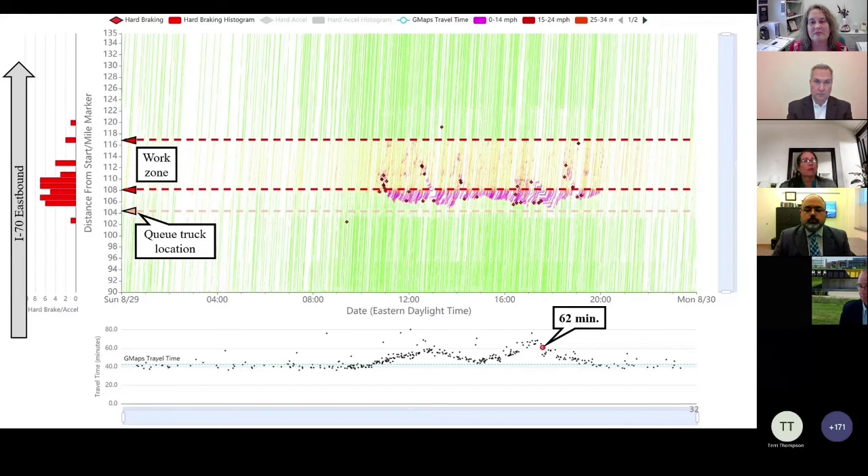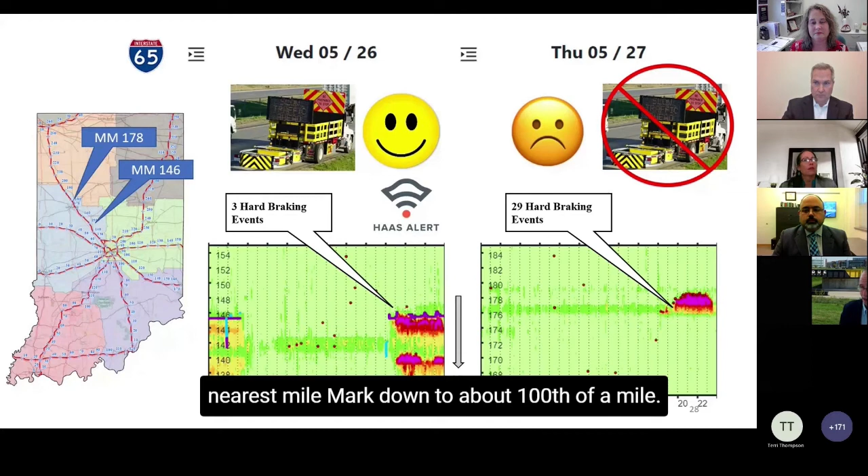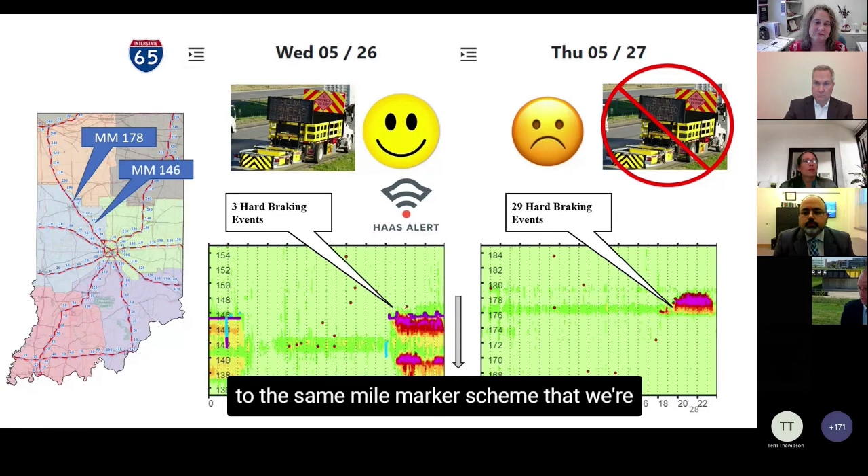Some more data questions for you. How do you synchronize the iCone, HAAS, or advanced warning vehicle data to the software to do this analysis? What we do is use basically the state-based GIS file. When we ingest the connected vehicle data records, every point we bring in, we immediately assign it to the nearest mile marker, down to about a hundredth of a mile. So whether we're bringing in Wejo connected data or HAAS or iCone data, we map that latitude and longitude to the linear reference. So those purple lines for the position of the queue truck are referenced exactly to the same mile marker scheme we're using for the Wejo connected vehicle data.

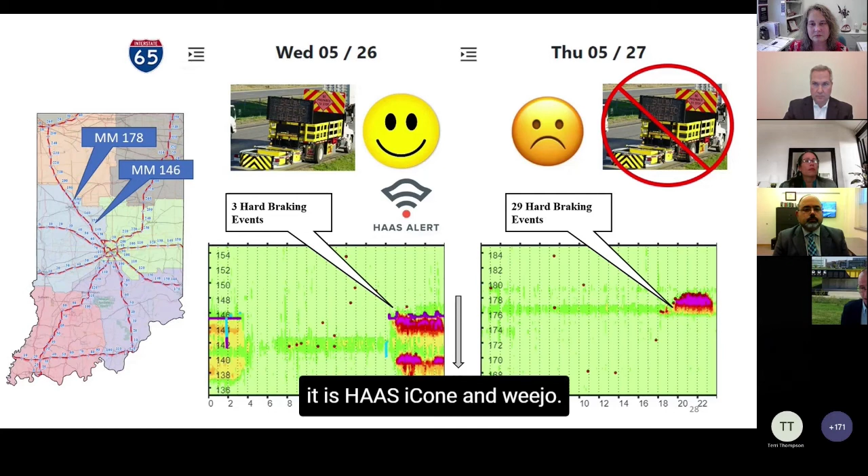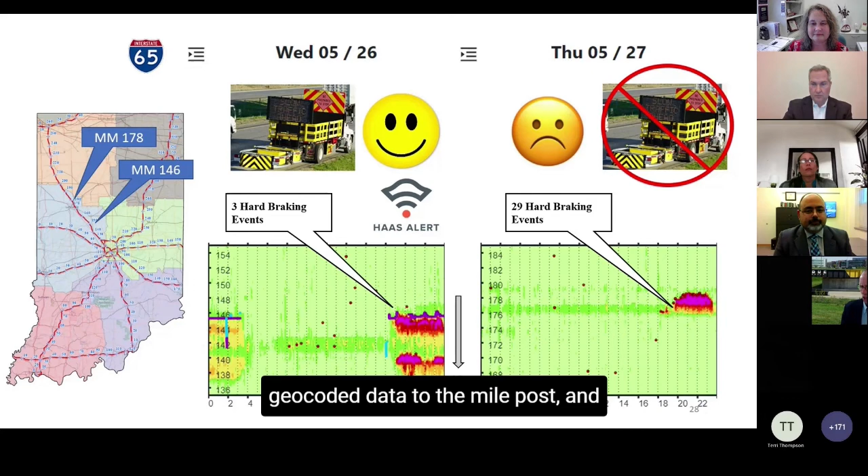Okay, great. Another question asked: are the heat maps developed only with the HAAS and iCone data, or is other data involved? You may have answered that by mentioning Wejo, but wanted to confirm. So yeah, these heat maps, in general, use multiple sources—HAAS, iCone, and Wejo. We also have an INRIX layer, and a weather data layer. So once you reference the data to mileposts, sometimes you want to toggle back and forth between heavy rain events or heavy wind events. Basically, we reference all of our geocoded data to the milepost, and that's what we're bringing in right now.

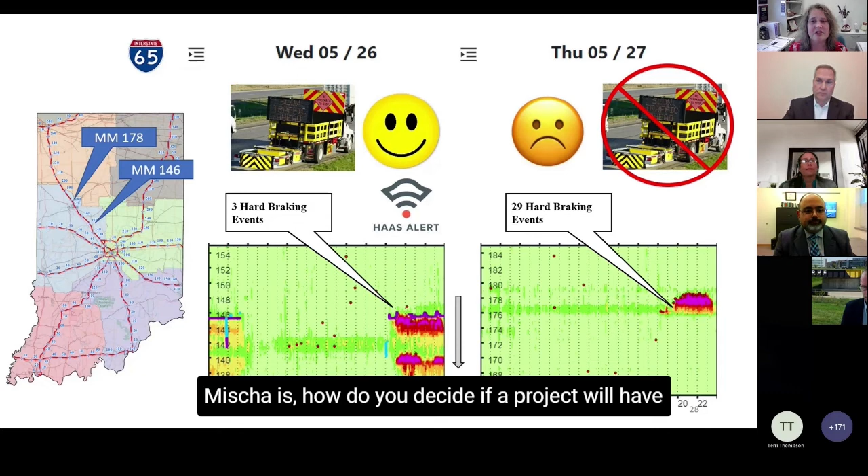Great, this may be a question back for John or Misha: how do you decide if a project will have queue trucks included in the maintenance of traffic, or MOT? Obviously not every project can have a queue truck, nor do all of them necessitate them. Yeah, absolutely correct. This is a byproduct of our lane closure policy. As I mentioned in my presentation, the ideal goal would be to not have queuing in any of our projects—we know that's not a reality. So when we do our queue modeling and evaluate the effect of the job, it really is a function of the amount of queuing and the risk to the motorist, which includes volume of people approaching, as well as

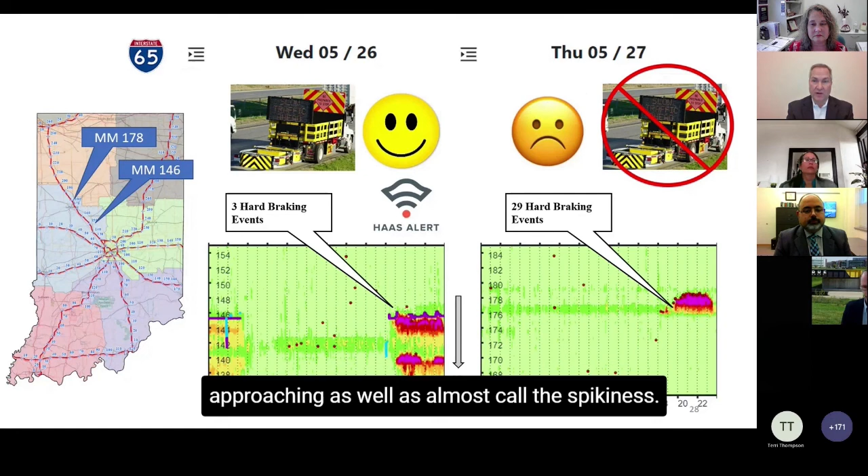I'd almost call it the spikiness. If you have a situation where you don't have just a massive amount of queuing all the time, but it can break out—it's kind of on the edge, kind of a continuous function—that's something to look at too. We don't have a great algorithm, but we do have a high-level individual looking at: okay, you've got queuing, you've got risk. Sometimes you just have massive queuing building up, and that's something that needs protection. Sometimes you have this breakout queuing over a particularly long time, with a lot of people driving into it. It's kind of a gut sanity check, because these are a resource.

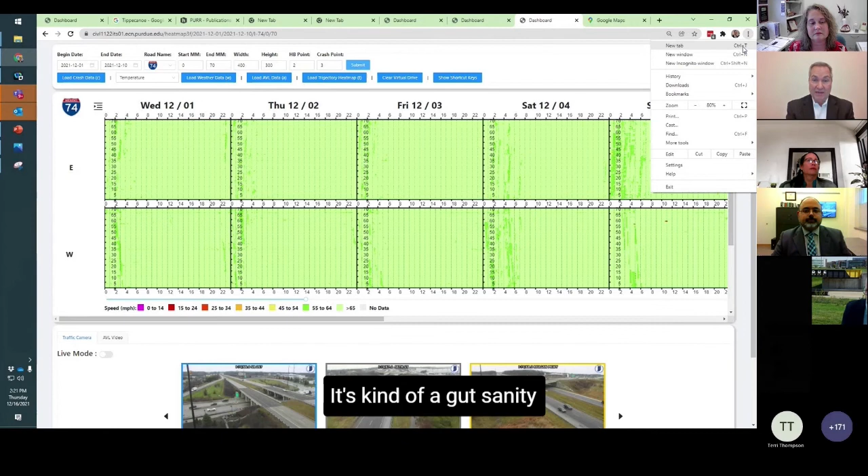These are a tremendous expense, and we're trying to protect the drivers and the workers with this process. So it's not an exact science, but it is a function of queue, risk, volume, things like that. And it's made by somebody, an experienced high-level person responsible for looking at our queue modeling.

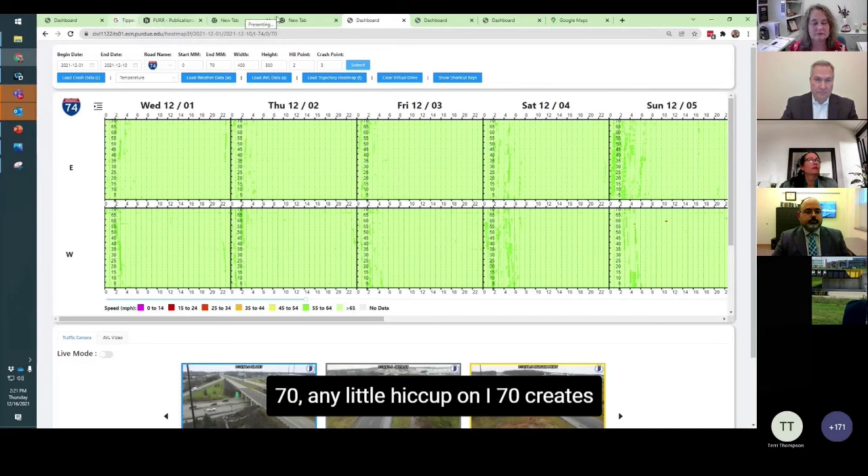John, let me jump in to support you. I just got the I-74 heat map up there, and I-74 is a corridor that doesn't have much traffic. As you point out, your conceptual perspective is it's green most of the time. And if we compare that with, like, I-70...

Any little hiccup on I-70 creates queuing. I'm just kind of looking backwards at the TiVo mode on I-70 after the construction zone - you see little hiccups, but it was a very fragile construction zone with heavy traffic. So maybe to build on it, some of the things you codify when you do this intuitively is you look at a corridor and say, is there anything with little incidents, little perturbations, that suddenly create a 5-mile queue? That's probably a pretty good flag that it's a corridor that might be right for that.

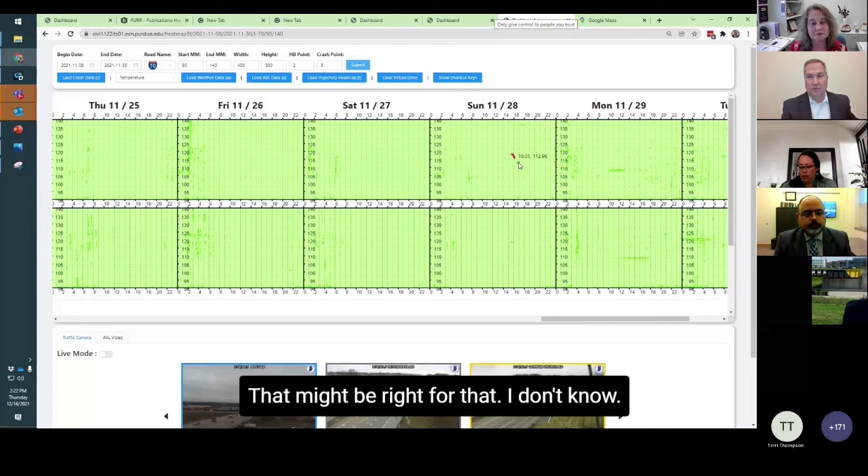I don't know, I'm just spitballing a little bit, John. Hopefully I didn't get too off script. No, I think that's terrific.

And the flip side, though, is when you do a queue prediction and it shows very little queuing, but you look at the severity of that - how much more queuing could result by just adding a little bit more traffic? Does it blow up then? How safe is a no-queue prediction when it says no queue? Does it just take a couple more cars an hour to start to make a problem? The safety of the prediction, given the realities we're dealing with.

I don't know if I said that very well, but I can speak to a place on I-70 near the Terre Haute area on the western side of the state. That's a place where often queue modeling predicts it's going to be just fine, but we've learned over the years that's not true. You start to do the work there and it could blow up. So very frankly, that speaks to experience as well. We do know our areas throughout the state, and that's again a call made by a high-level INDOT engineer.

I think that ties back into something we heard throughout the workshops - really looking at that sensitivity analysis and running a couple different models. So you have your best guess based on what you know, but what happens if I tweak it up a little or tweak it down a little, and see what the probability of that is. And then using these findings from actual work zones to feed back into that process. I think it's really great.

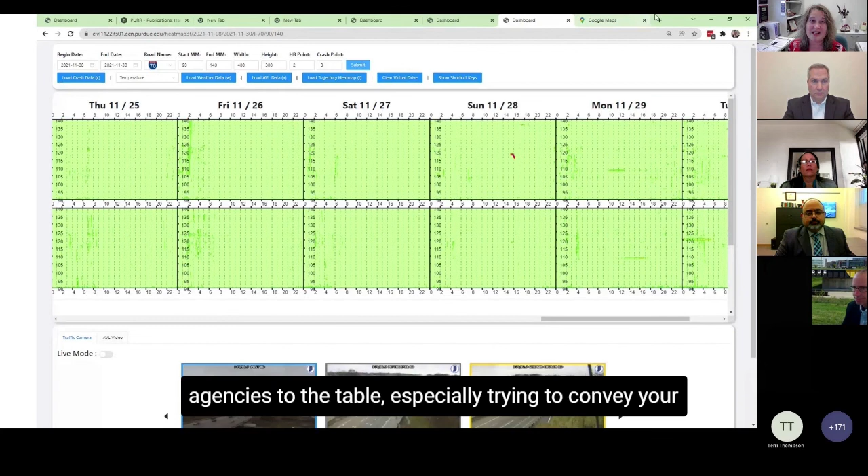I'll just say we had this conversation at several of the workshops. I can't remember exactly which state we had it most in depth, but talking and bringing those mapping agencies to the table, especially trying to convey your work zone conditions so they're adequately portraying that, is an item we need to work on with different stakeholders. I don't know if any of the rest of our panel quickly has an answer, Martha, but I believe that'll be the last question we can attend to before we close out today with Martha's final comments.

The only comment I wanted to add, which I agree with, is that there are some DOTs trying in-cab messaging for trucks, like North Carolina DOT has a pilot. I believe New Jersey and some other states are looking into that too. With in-cab messaging particular to CMV vehicles, they'll get that work zone information directly. We have heard about this issue and will bring it up to our partners to see what else can be done. But I don't know if our stakeholders today, Indiana or Purdue, have any comment on that.

It's a problem. We just had a bridge closure on the interstate where the structure got damaged by vehicles diverting off system. It's a problem, it definitely needs to be discussed, and it's a broader conversation—the trucking industry needs to be brought into that conversation.